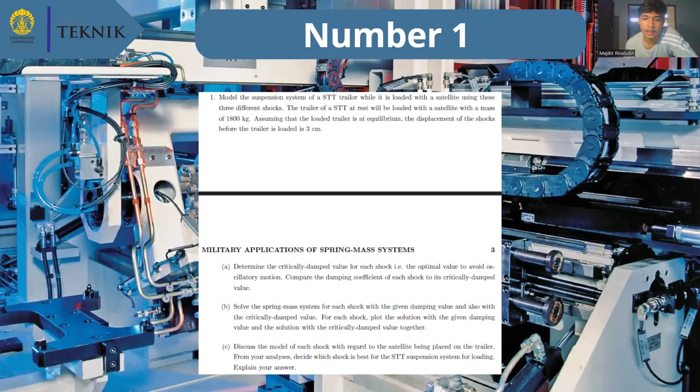So question number one is like this: the theory application of a spring mass system. Part A is to determine the critical damping value for each shock. Part B is to solve the spring mass system for each shock with the given damping, and also with the critically damped value. Part C is to discuss the model for each shock.

Number one is the intention. The STT, or satellite transportable terminal, is loaded with a satellite, and the suspension system must absorb shock to protect the satellite during transport. So the goal is to ensure that the STTs are reliable and protected while being loaded and transported, especially under harsh conditions.

The initial thinking is that the trailer is loaded with a satellite and the suspension system must absorb shock to protect the satellite during transport. From the data, we can get the mass, displacement, spring constant, and damping coefficient. So what we need to find is, number one, the critical damp value.

Number two is to solve the spring mass system. Number three is to compare the shocks.

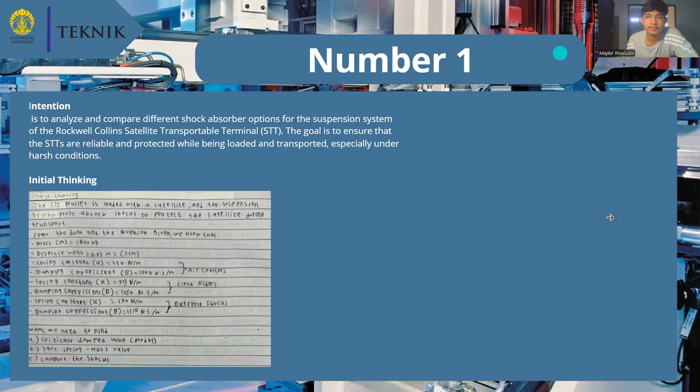Here's the illustration: Part A is that the critical damp value of the damping coefficient for a spring mass system is determined by the formula BC equals 2 times the square root of km, with the spring constant and damping coefficient. The difference equation is like this: M times d2x/dt2 plus beta times dx/dt plus kx equals f(t), determined by the roots of the characteristic equation M lambda squared plus beta lambda plus k.

We can solve the problem using Python and determine which shock is the best for the STT suspension system, following with an explanation of the reasoning. So the instruction set, for Part A, is the air coaster.

That we can get: BC is 1258.30 Ns/m, and K is 220 N/m, and M is 1800 kg. For cloud riders we get 651.82 Ns/m, and for extreme shock it's 1007.26 Ns/m.

Number B is using Python, and we get results like this, shown in the calculator on the last page. Last, we're going to show the algorithm. The air coaster, and the damping will oscillate before settling down.

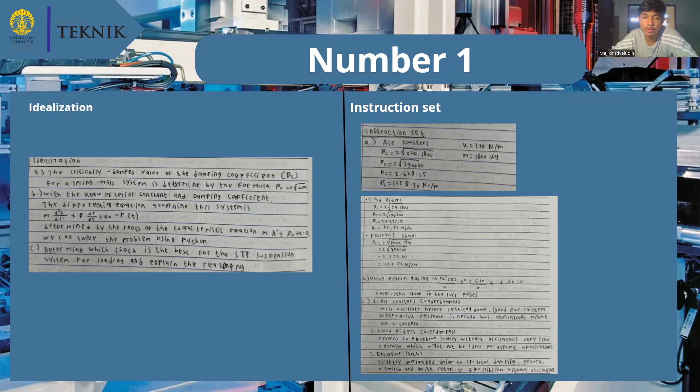Slightly underdamped, similar to critical damping, ensuring a - smooth and quick return to equilibrium without oscillating. So the best choice, considering the application for military satellite transportable terminal, is that the suspension system should prioritize stability and quick settling without oscillation.

So the air coaster has too much oscillation with the given damping - it's not good. Cloud riders is over damped and slow response with the given damping. Extreme shock is close to critical damping, providing a balanced response with quick settling and no oscillation. So the recommendation is extreme shock.

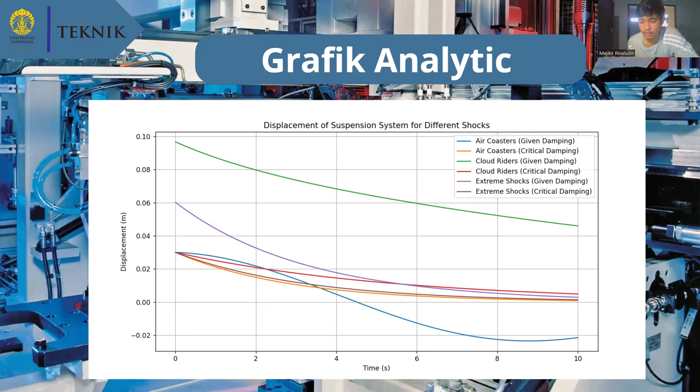The x-axis represents time in seconds, with lines representing different scenarios. Each line corresponds to a specific scenario with different shock type and damping condition. There are three types of shock: air coaster, cloud riders, and extreme shock. Each shock type is analyzed under two damping conditions: given damping and critical damping.

Here's question number two. The intention is to determine the proper shock absorber suspension system of the STT (satellite transportable terminal) that will avoid damage to the satellite during transportation over severe terrain.

The initial thinking is we can solve the non-homogeneous equation, compare the maximum and minimum, identify and analyze the transient and steady state. The simplifying assumption is that the system is initially at rest, and the forcing function represents the worst terrain condition at the highest speed of an HMMWV trailer.

The instructions show that first we need to solve this equation and plot the solution. To solve it, we get the force, the differential equation, and use Python coding.

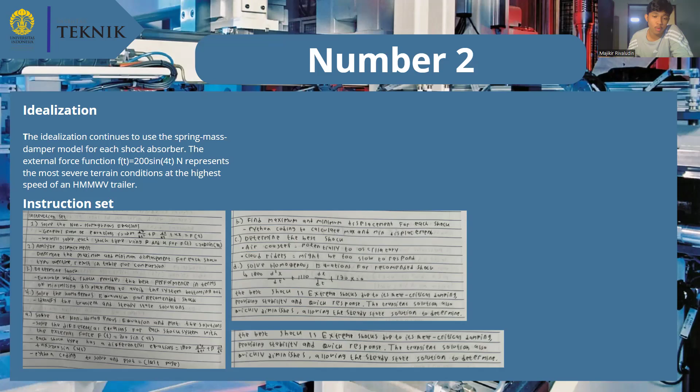The air coaster and cloud riders might be slow to respond, but the air coaster is potentially prone to oscillation. The best is the extreme shock, because critical damping provides stability and quick response. The transient solution also dies out quickly, allowing the steady state solution to dominate. Here is the code and the graphic analysis.

For the graphic, the plot highlights how different shocks impact the suspension system's displacement over time. The air coaster shows the largest displacement, inducing a rougher ride, while the extreme shock results in more moderate displacement.

Understanding this response is crucial for designing suspension systems that can effectively mitigate the impact of various shocks and maintain stability.

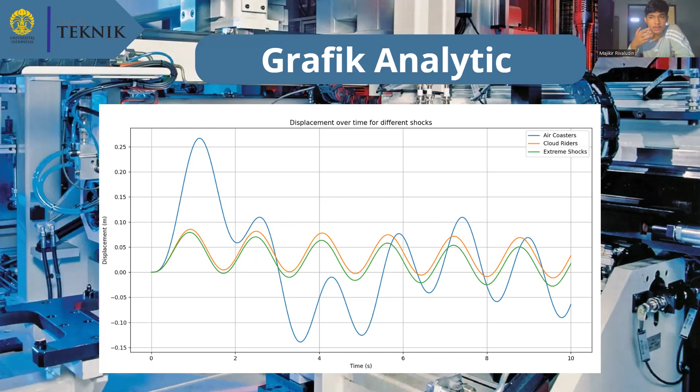Here's question number three. The intention, the goal, is to solve an initial value problem involving a spring mass system with given specifications for the suspension system of the STI.

The initial thinking: first, solve the differential equation for the system. Second, identify the specific condition under which the solution is invalid. Third, create an interactive plot of the solution over a specific time frame and discuss potential damage.

The forcing function is given as F(t) = 200 sin(4ωt), and we need to solve the system with k = 25 N/m and damping coefficient beta = 0 N·s/m.

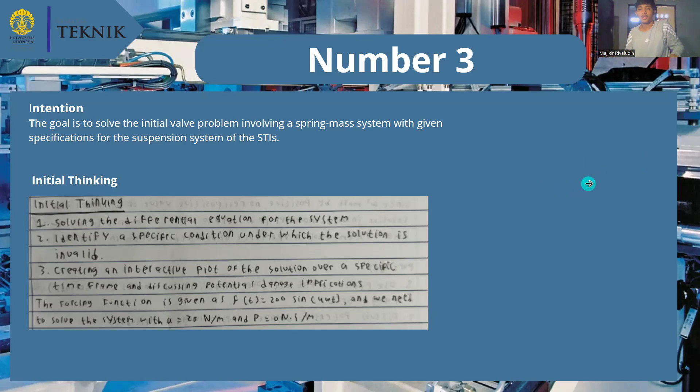Here's the visualization for number three, showing the differential equation formulation for an undamped system.

Since omega squared must be positive, there is no real positive value for omega, which makes the solution invalid. However, if we cause resonance, the system would experience unbounded growth in amplitude.

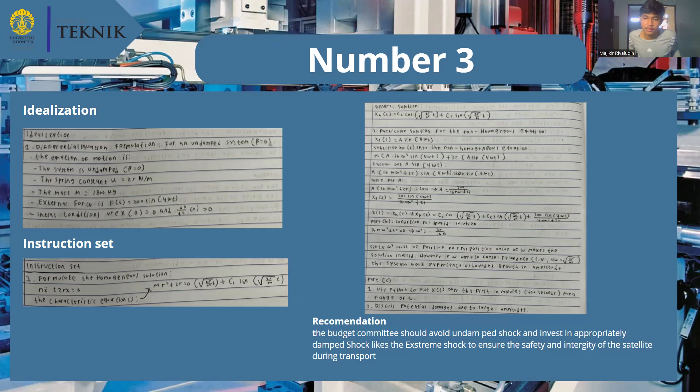The recommendation is that the budget committee should avoid undamped shocks and invest in appropriately damped shocks like the extreme shock, to ensure the safety and integrity of the satellite during transport.

Here is the code and the graphic analysis, of which we actually get two graphics. Graphic one shows displacement over time for the extreme shock, non-homogeneous case, which keeps moving, whereas the homogeneous case reaches steady state.

The second graphic shows displacement of the spring mass system for various frequencies: 0.5 rad, 1.0 rad, 1.25 rad, 1.5 rad, and 2.0 rad.

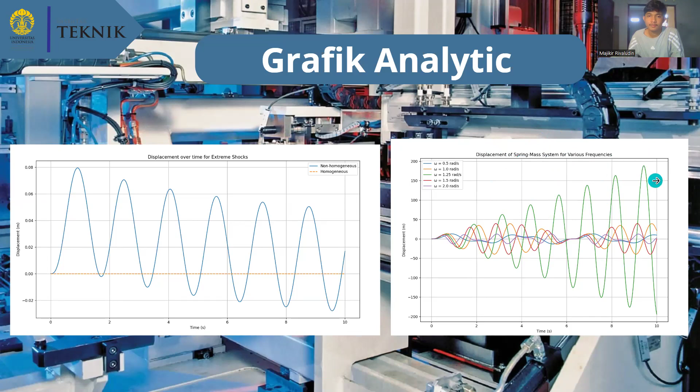Here's question number four, and the intention.

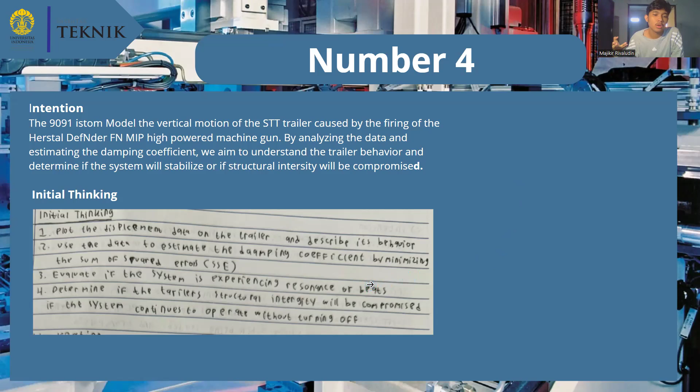So the initial thinking we can get is: number 1, plot the displacement data. Number 2, use data to estimate the damping coefficient by minimizing. Number 3, evaluate if the system is experiencing resonance or beats. Number 4, determine if the trailer's structural integrity will be compromised if the system continues to operate without turning off.

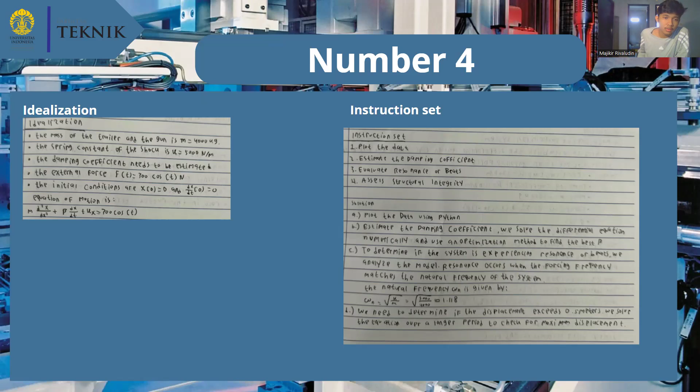So here's the idealization we can get: the mass is 4,000 kilograms and the spring constant is 5,000 N per M. The damping coefficient is to be estimated. We can search the damping coefficient, and the external force we can get is 700 cos(t), and the initial condition we get is 0 and 0.

So the instruction set: number one is plot the data, two is estimate the damping coefficient, three is evaluate resonance or beats, and four is assess structural integrity.

So the solution we can get is plot the data using Python and estimate the damping coefficient, and C is to determine it using the formula WN equals K per M, which we get as 1.118. So we need to determine if the displacement exceeds 0 meters.

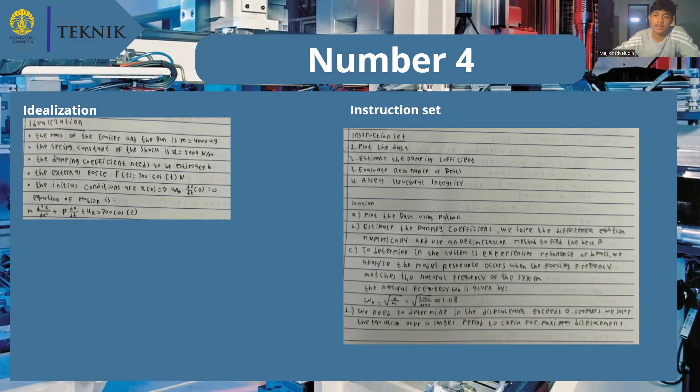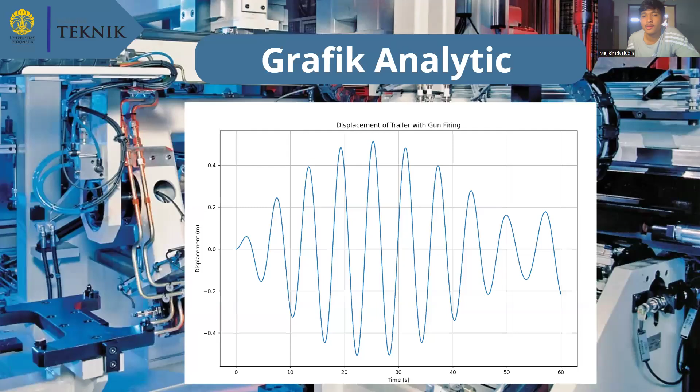We solve the equation over a long period to check for maximum displacement. So this is the code, and this is the graphic analysis. The graphic we get is the displacement of the trailer with gun firing. The displacement moves up and down, and time is from 0 to 60. You can get a graphic like this.

So question number 5 is like this. The intention is to analyze the performance of the shock system and determine whether the structural integrity of the truck will withstand the terrain.

The initial thinking is: the extreme shock with spring constant K of 170 N per M and damping coefficient B of 110 N per M were chosen as the best option to prevent damage to the satellites while being loaded and transported.

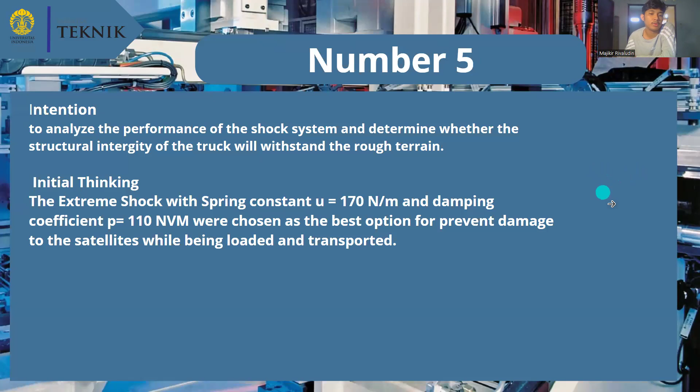So the illustration for number 5 is to model the suspension system as a spring-mass system with spring constant K and B, where the external force applied to the suspension system is modeled as a series of impulse functions.

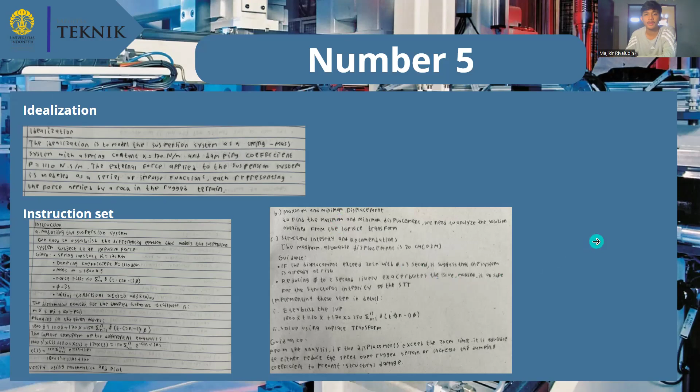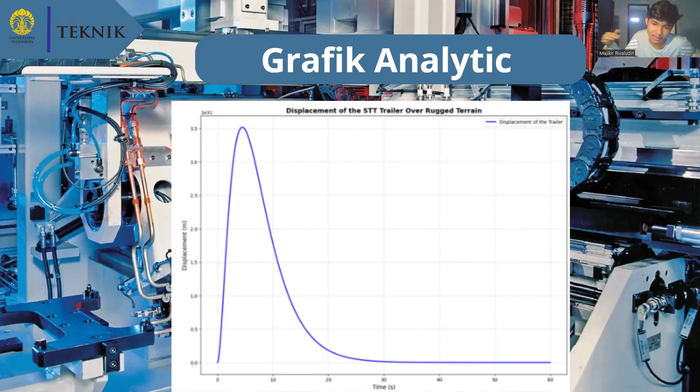And here's the code for number 5, and this is the graphic analysis. So what we get is the displacement of the STT trailer over rugged terrain: we can see from 0 up until 5 seconds the displacement is 3.5 meters, then it goes down until 20 seconds where displacement gets to about 0.25, and it's steady state until 60 seconds.

So the last question is the Elon Musk question. Elon Musk's statement that our existence may be just a simulation raises deep questions about philosophy and epistemology. In my opinion, this concept is in line with a special branch of philosophy which proposes that what we think of as reality can actually happen in our daily life.

It's just how we respond to it. If we really think technology can threaten our life, then we will think that technology must have its limits. And if we respond with the thought that technology can bring very good benefits to humans without seeing the bad side - why then is humans better than AGI in the future?

So in my opinion, humans have a remarkable ability to think creatively, generate novel ideas, and innovate in ways that may be difficult for AGI to replicate. This creative process often involves intuition, emotion, and experience that are invaluable to humans.

Humans can adapt to a wide range of unpredictable, novel situations. This adaptability stems from our ability to learn from experience and apply intuition and improve in real time. Humans experience consciousness and self-awareness, allowing them to reflect on their thoughts, actions, and existence. This introspective ability is a profound aspect of human life that AGI lacks.